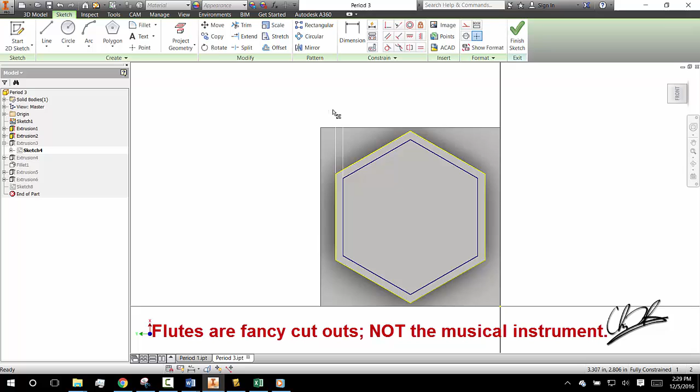Okay, so you want to do something fancy and you want to put some flutes around the outside edge of this. The first thing we have to do is give ourselves some space. So let's go edit the sketch where that is and give ourselves double the room and make it 1/4 of an inch.

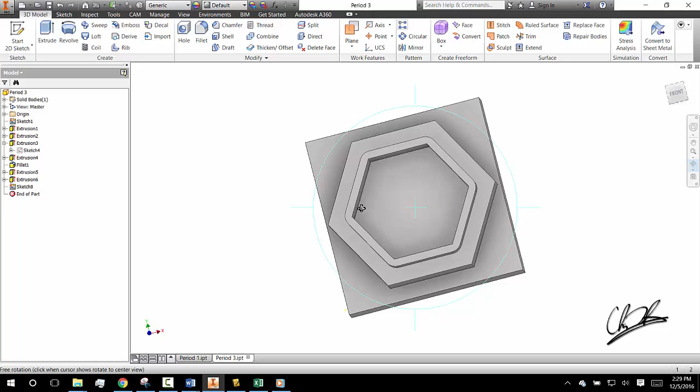Notice too that in the last video we made this parametrically so that what we do on this side changes on this side, so we have as much room on the bottom as we do on the top. That's going to help us out later. And once we've made that larger, we can then just go and start another sketch. Let's sketch right on that plane.

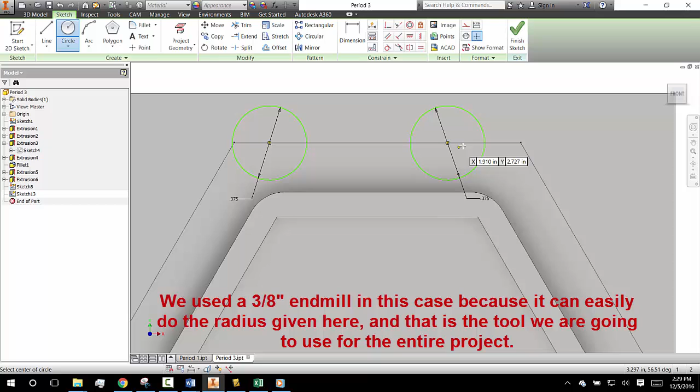And let's define our flute. I'm going to define it with a circle that's 3/8 in diameter because I'm going to use a 3/8 tool. I'm going to just put another circle down here, and that's going to be 3/8 diameter as well. Another dimension that I want to put in there is I want to dimension from here to here.

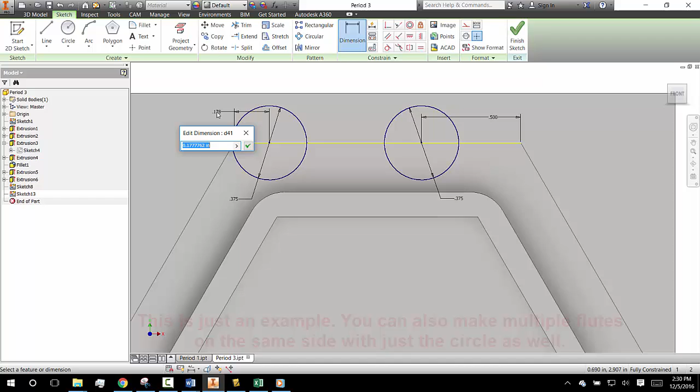I'm going to make that 0.5, and I want to make it symmetrical so that my container looks the same whether I put the top on any of 6 different ways. And we're going to make that 0.5 as well. That gives us 2 circles. I'm going to further define the geometry by making something to cut out. And I'm going to trim out this on the inside. And that'll give me that.

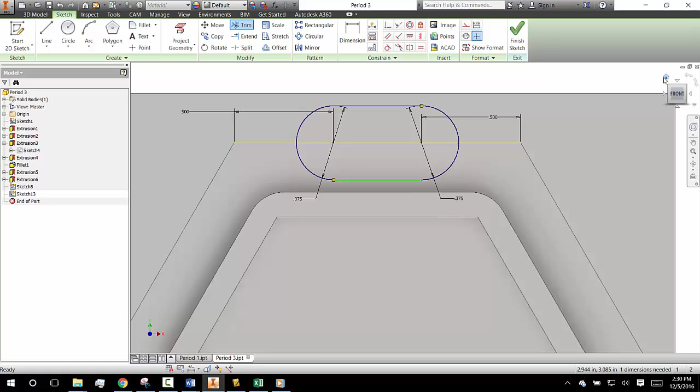The next thing that I can do is while I'm in that same sketch plane, I'm going to draw a line. It's going to be a construction line, really. I want it to go to the center of my container. And the reason I want to do that is because I'm going to do a circular pattern of that geometry around that center point.

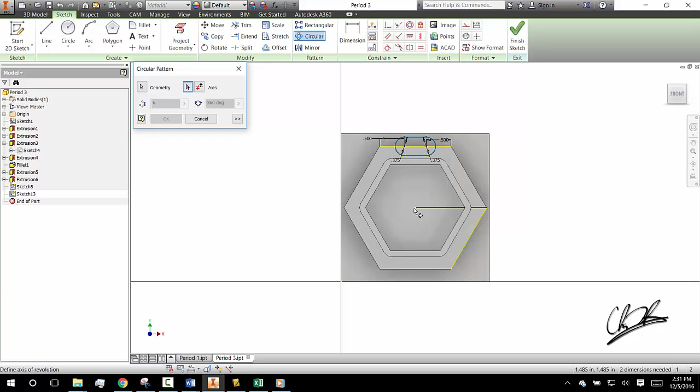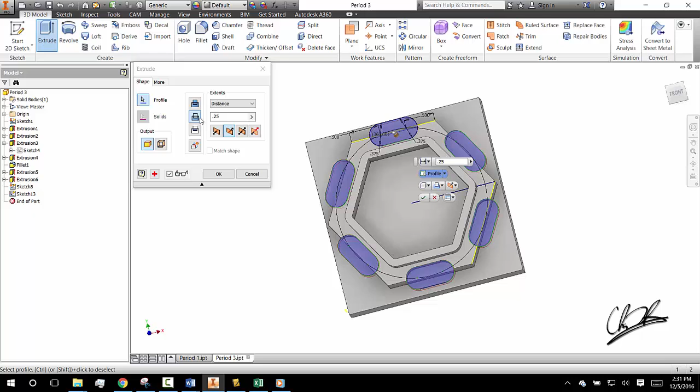And if you notice, it's going to create that all the way around my container. Because it has 6 sides, I chose to do it in 6 different pieces. And I end up with that. This is really kind of cool. Finish my 2D sketch. I can extrude a cut. I can say OK, and it will make all of my flutes.

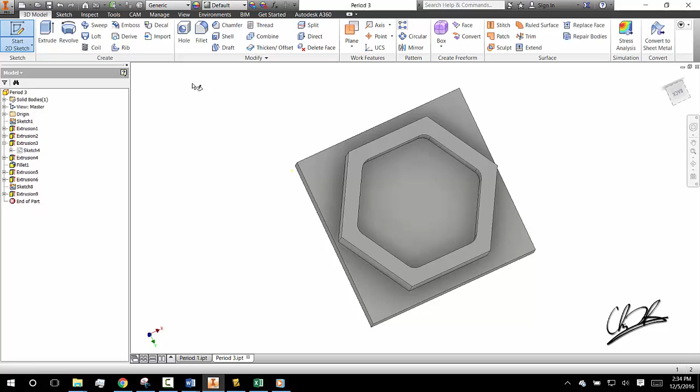So now let's take these flutes and put them on the other side so that they match up. This is really easy to do also. Let's just flip this over. We'll start a sketch on this and then rotate it around. And what I'm going to do now is take all these pieces

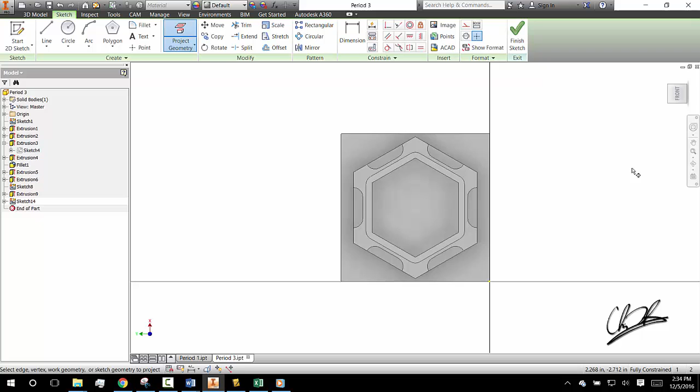and project this geometry over to the other side. So that when I flip this around, I've got that geometry right there. I don't have to measure anything because I've done that in the first one. I finish my 2D sketch.

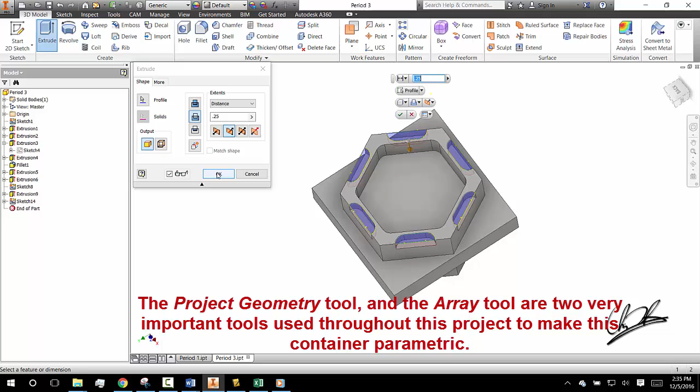I say extrude. I can now click on all 6 of these, make sure it's a cut, same depth if I want, and say OK. And now every single one of the flutes on this side is exactly the same as every single one of the flutes on this side. So if I put my top on my container a different way, they all match up.

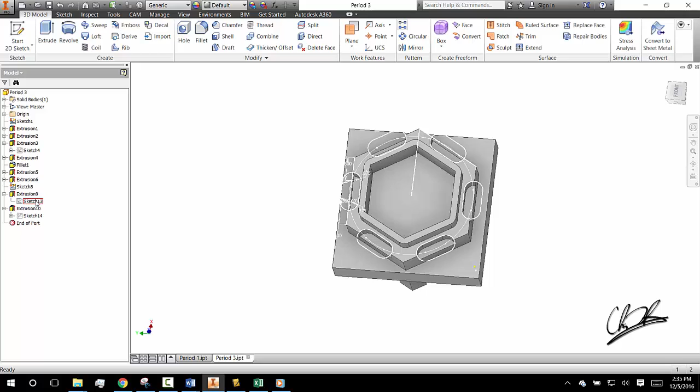The other bonus to this is if I ever decide that I don't like these flutes, I can go into this sketch and edit that one sketch, change the dimensions of this one, and because these are an array of this, these will change with it, and because I projected the geometry for these from that other one, all the flutes will change parametrically. Change one flute, they all change.

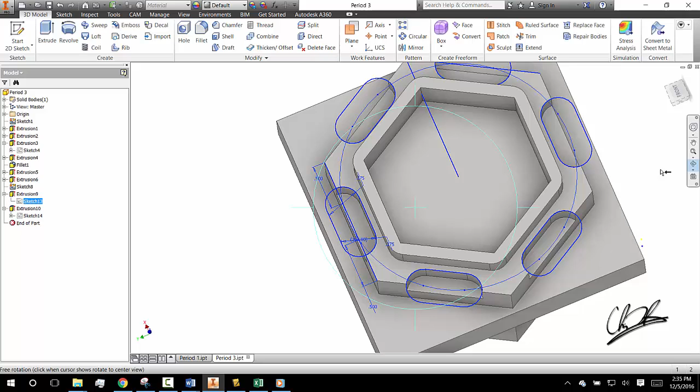That might not be the look you're looking for, but that's one way to do it, and you can use these techniques to do anything you want on the side of the container.